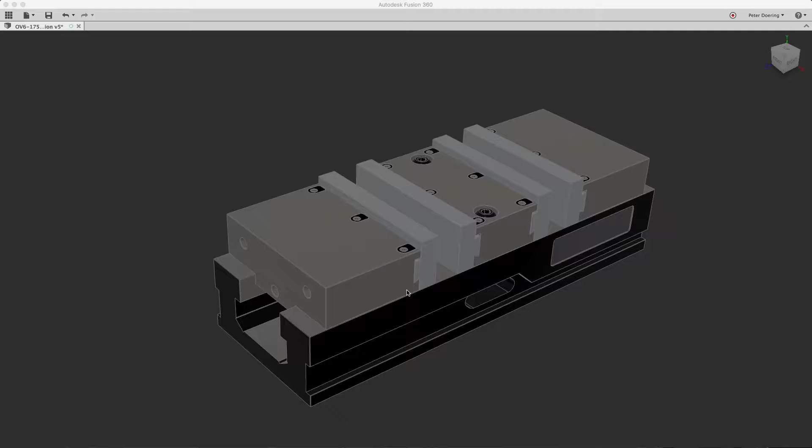So the question is, how do you work with an imported assembly that was created in another CAD system? How do you assemble this in Fusion 360 most efficiently? This is a vise assembly that's been seen on the forum a few times, and it's already somewhat organized.

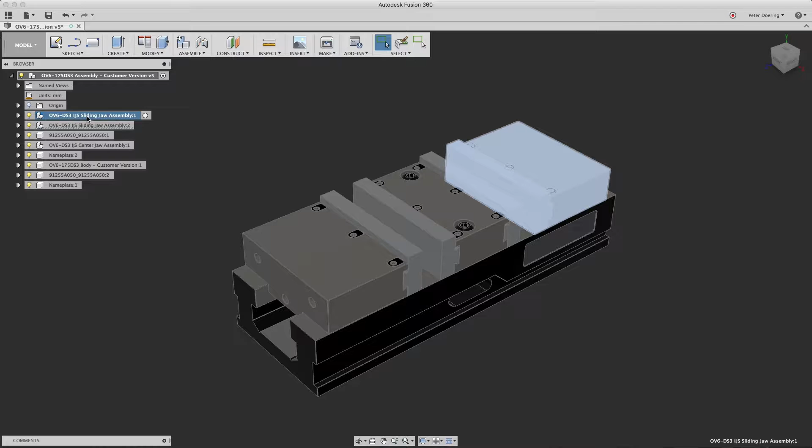If your geometry comes in simply as a collection of bodies, you'll just simply have to do some organizing more or less manually by hand. In this case, it's already somewhat organized. We have some functional assemblies. We have the jaw here in the back, and we have another jaw assembly in the middle. Then we have one here. We have a base, etc., etc.

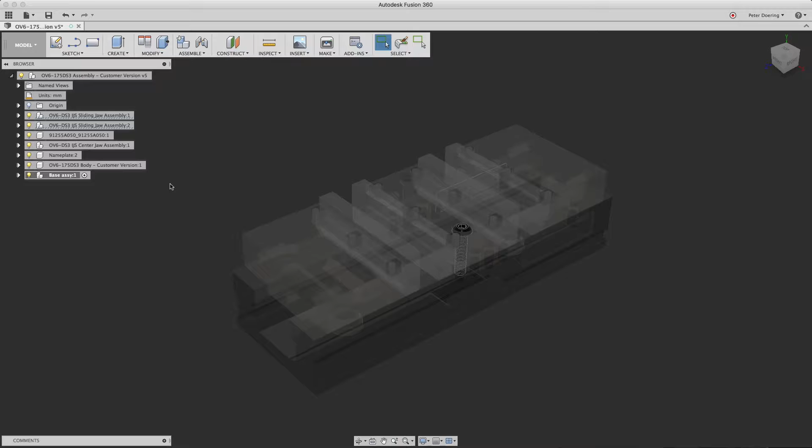But that's still not enough organization for me. I'm going to create another component. I call that base assembly. And I'm simply going to drag all the components that I want in this assembly into here. And the way I'm sorting this is by what parts are going to be stationary and what are going to be the moving parts, in this case the jaws.

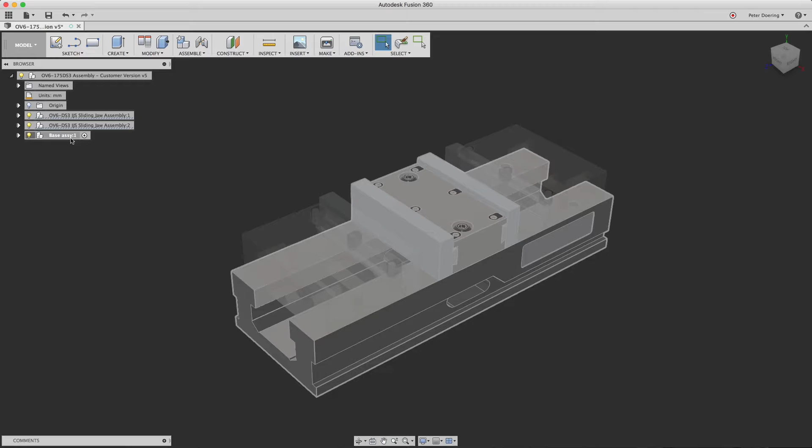So that center jaw assembly also goes into this base assembly. So I'm basically left with three assemblies here, the left and the right jaw and the base assembly. So the next thing I'm going to do is I basically create rigid groups out of these assemblies. So now we have those assemblies rigid group. They're basically

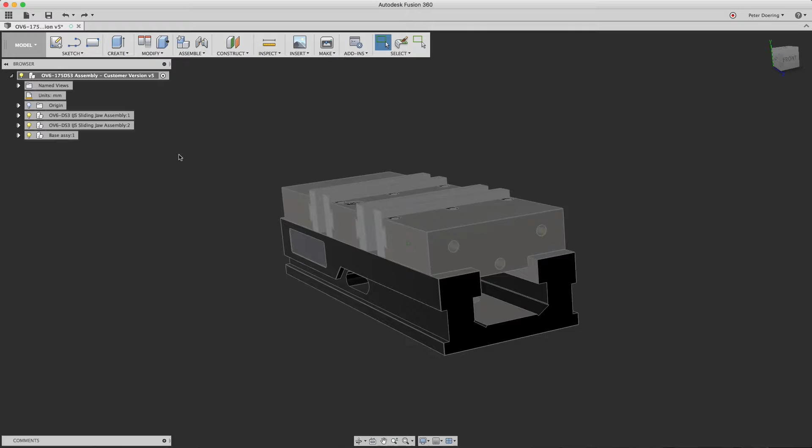can be moved around. So the next thing I'm going to do, I'm going to create a functional joint. I want a slider joint, and because this assembly came in already in the assembled location with all the pieces in place where they need to be, I want to use an as-built joint. But with the timeline turned off, as it is right now, I can't do that.

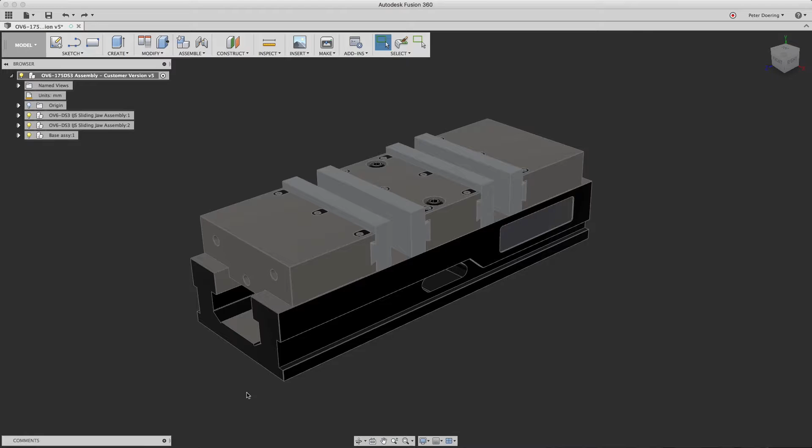And that's another caveat that you need to be aware of. When you import geometry, it always comes in with the timeline turned off. And that also makes sorting these parts into different assemblies much easier because there's really no dependency between those components. And it also keeps things a little lighter in terms of data because not having a timeline just simply means you have less data.

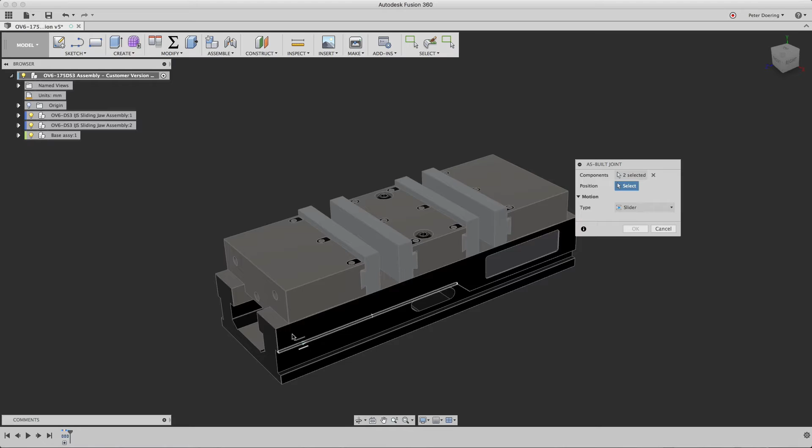But in this case, I want to turn the timeline back on, so I enable capture design history. There it is on the bottom. And now I can create my as-built joint between components, between this component and that component. And I want a slider joint. So now I need to pick a linear edge here. And I'll pick this one.

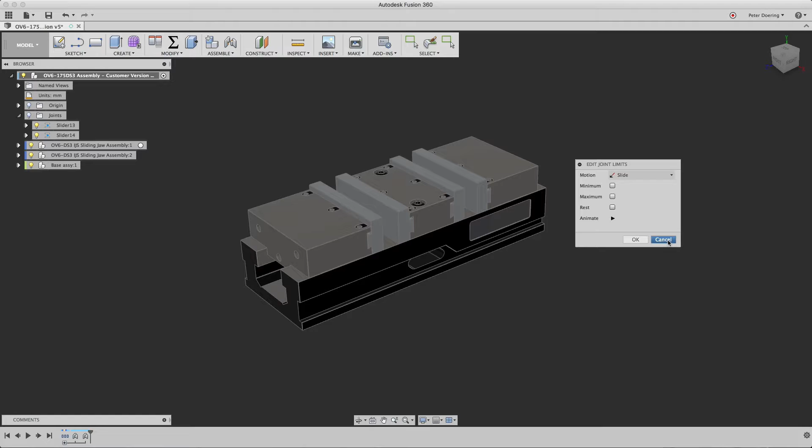And there it is. And I'll do that again between these two here and pick another edge. Okay, so one could actually go ahead and apply sensible joint limits here, but I'm not going to do that for the purpose of this demo. So now I have these assembled.

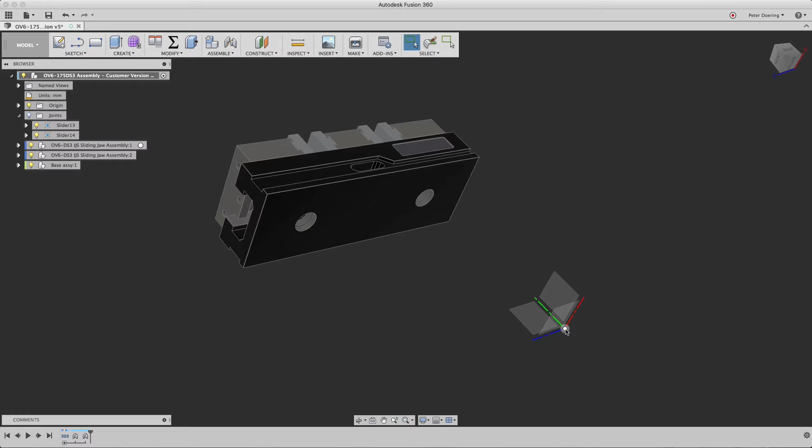I could go ahead and ground one component, but I'm not quite done putting things into position, because something I have not done yet is showing the origin. In my almost 30 years of CAD experience, I've noticed that the joint origin, if it's placed in a sensible location, can really help debugging a design. Once things start going wrong, if the joint origin is in a sensible location, it often very much helps.

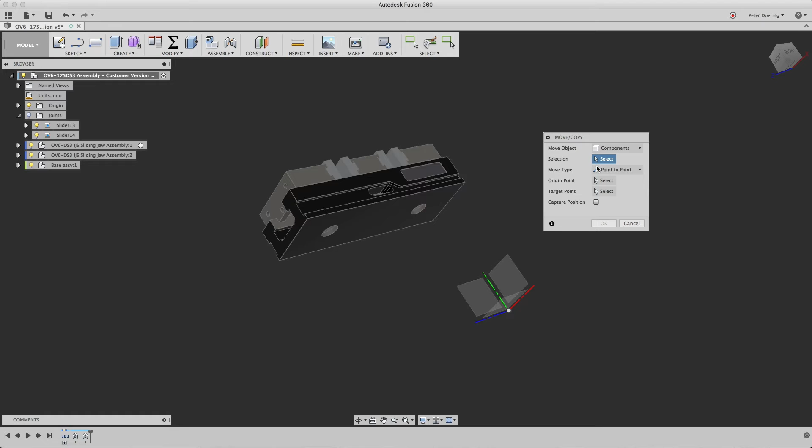So I'm going to simply move this into position. When you invoke the move copy command, be aware of what you're selecting here. I also don't want the free move. I want the point-to-point move here. So I want to move components. I'll select one. I'm going to select my point number 1. It's almost not visible here, but that is this point. And I'm going to move it here to the joint origin.

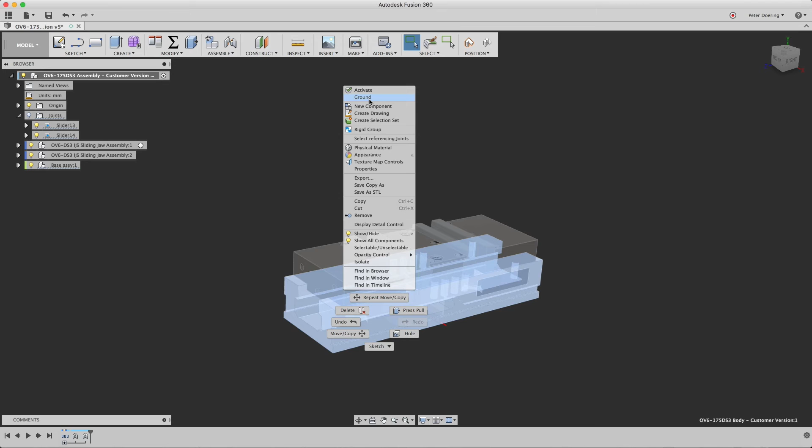And that's okay. And now I can actually go ahead, right click on this and ground this component. Another caveat, you cannot ground an entire assembly. You can ground a component in an assembly, but not an entire assembly. It asks us here if we want to capture the position. Yes, we do, because we moved it to the joint origin.

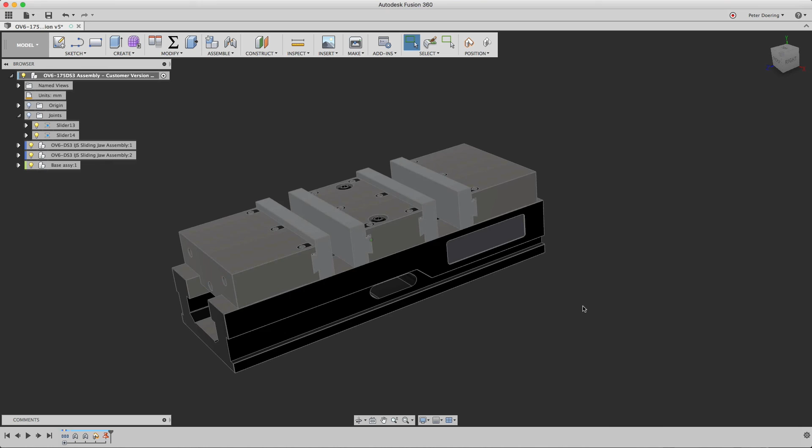So that's where we want that position to be captured. Now we can turn the joint origin back off. We can move our sliders, and we have a perfectly assembled assembly.